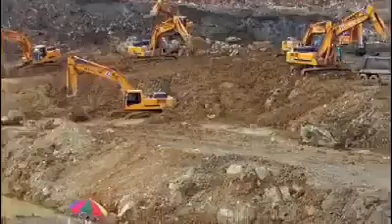But the Subic shipyard didn't have such an easy start. What made this project possible, despite such difficulties, was HHIC Phil's enthusiasm, which turned crises into opportunities.

Starting in May 2006, HHIC Phil completed the construction of a mega-scale shipyard on 304 hectares of land in merely 35 months. Prior to construction of the shipyard, HHIC Phil also won the bid for 12 container ships, writing a new chapter in the history of global shipbuilding.

HHIC Phil was also awarded a presidential award by the President of the Philippines in July 2008, for the first time in Asia.

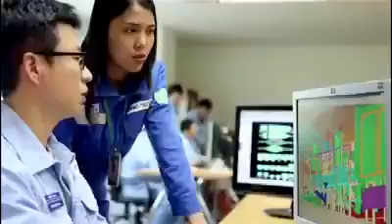The Subic shipyard serves as a mechanism for maximizing synergy in economic development for both Korea and the Philippines. And it helped the Philippines become the fourth biggest shipbuilding country in the world. It has also contributed to creating over 20,000 new jobs and has been considered a role model for our mutual growth.

The layout of the shipyard and production system, built according to a thorough design plan, is creating a new paradigm in the design of efficient global shipyards.

The world's largest dock, number 6, is 7 times the size of a soccer field and has a capacity of 450,000 tons per year. Dock number 5 also has a capacity of 250,000 tons. In addition, there is a 3.8-kilometer long quay as well as 4 giant Goliath cranes. It is a global-scale shipyard.

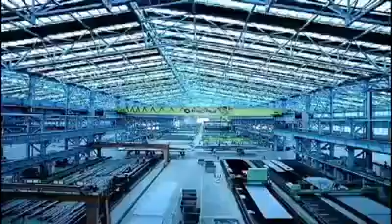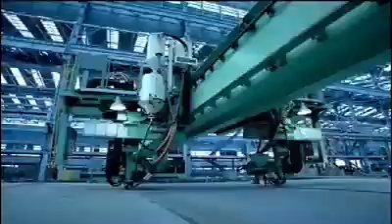The pre-treatment and cutting shop are arranged into 4 buildings and boast state-of-the-art equipment including 21 plasma cutting machines and a 2,200-ton roll press. It has the capacity for pre-treatment and cutting of 500,000 tons annually.

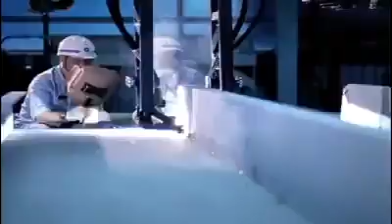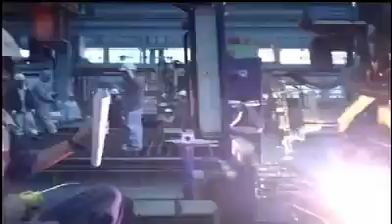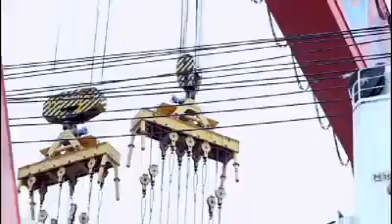The Subic shipyard boasts the ability to secure materials and supplies as well as state-of-the-art production equipment. The shipyard has a total of 9 ships, including 2 multi-purpose carriers, tugboats, and ro-ro vessels. Core materials and components are directly procured from Korea using these vessels, which helps with competitiveness in cost and quality.

The Subic shipyard, which has large-scale facilities and state-of-the-art equipment, built numerous vessels starting with a 4,300 TEU container vessel and a subsequent 6,600 TEU container vessel. It also has the capacity to build all types of merchant ships, including 114,000 and 160,000 ton crude oil tankers, and 180,000 and 205,000 ton bulk carriers.

It also created the foundation for the offshore structures market by building a CALM buoy, which serves as the bridge between fixed platforms and shuttle tankers, and an 18,700 TLC floating dock for the production of caissons. It also has a portfolio of various offshore structures, including a near-shore barge to support offshore plants.

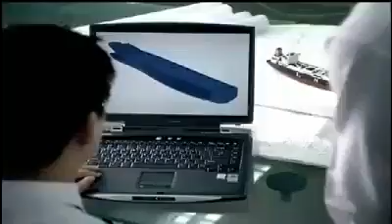It is now focused on full-scale production of high-value-added vessels, including the VLCC, VLOC, tankers, QMAX LNG tankers, LPG tankers, drill ships, and the FPSO. With expertise gained from various projects, the shipbuilding industry is a technology-intensive industry that needs to respond to the increase in the size and speed of ships and the increased role of information technology. The competitive edge in terms of design and production is based on these three areas.

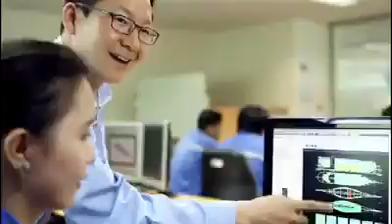Through close partnerships with Yeongdo Shipyard and the R&D Center, the Subic Shipyard constantly strives to improve the design of ships, develop digital shipyards, eco-friendly construction, and future-oriented R&D.

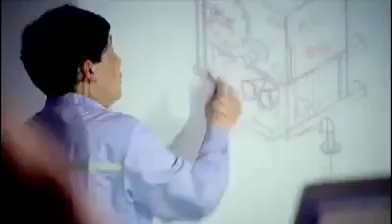It is involved in a variety of R&D efforts to create quality ships, including developing and validating various ship models, developing dust-proof design, and advanced automation systems.

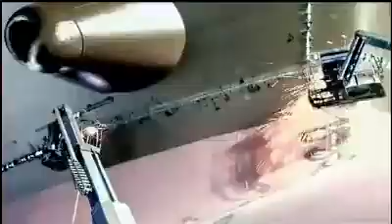HHIC Phil aspires to become the mecca of ship construction that brings customer satisfaction by securing the world's most powerful technologies.

A comprehensive safety and environmental system is the foundation for creating excellent ships. Under the motto, Safety First, HHIC Phil is committed to 3O HSE policy.

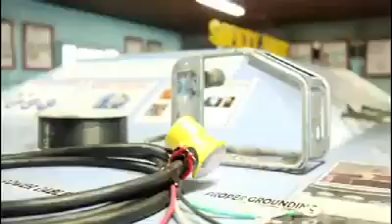Its Safety Education Center models the actual work site, allowing managers and plant workers to experience the work firsthand and understand the importance of safety management.

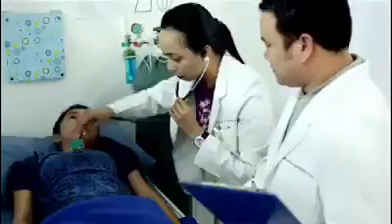There is a medical clinic on site with doctors and nurses to manage the health of the employees, as well as respond immediately to accidents. The clinic works closely with a nearby hospital to minimize the occurrence of diseases and injuries.

These measures helped acquire the OHSAS 18001 safety certification and ISO 14001 International Environmental Certification in 2009, equipping it with the appropriate international safety and environmental systems to carry out its projects.

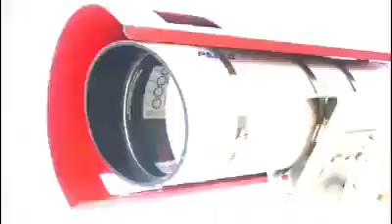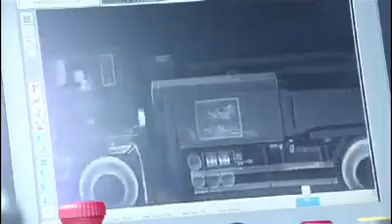As the shipbuilding industry developed into a technology-intensive industry, shipyard security became more important than ever. HHIC Phil's central control room quickly and accurately grasps happenings within this shipyard and takes a complete security stance when situations arise. Strict access control including a 3-level iron gate, a license plate number recognition system, an emergency access control device, an X-ray vehicle search device, and a biometrics access system has been employed at the shipyard.

HHIC Phil also provides luxury apartment-style accommodations to enhance the quality of life for the ship owners. High-quality infrastructure, including an international school and hospital for children and families living in Subic, also contribute to a safe and reliable business environment.

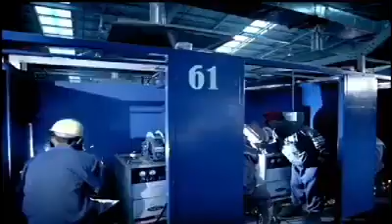HHIC Phil aspires to be a company for the people by engaging in a variety of social contribution efforts. One of the ways HHIC Phil contributes to local regional development is through its world-class 2,500-person capacity training center to train and develop a select group of local talents.

HHIC Phil also cares for the welfare of its employees. The company built a total of 1,000 employee housing units and offered them to employees for an affordable rate.

The company is also at the forefront of improving the quality of life for the local community by donating a variety of community facilities. In addition to these, HHIC Phil provides various medical services, including free health screenings and medicine for local residents without adequate medical care.

HHIC Phil will continue to do its best to make the world a better place for everyone by contributing to society.

We're preparing for the next century. HHIC Phil's Subic Shipyard is creating a new paradigm for offshore plants through its world-class ships and technology.

Subic Shipyard will change the future of the shipbuilding industry. And that change begins now. Run to the new world. HHIC Phil Subic Shipyard.